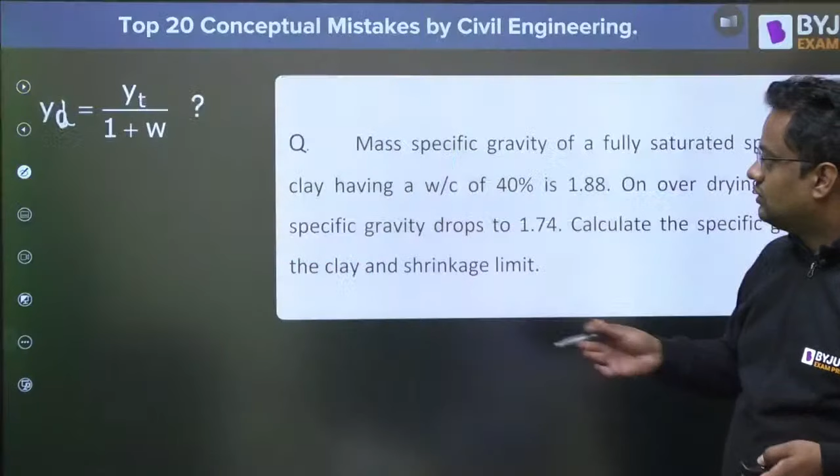Okay, let's come quickly to the top 20 conceptual mistakes, and this is number 1. Everyone out of you might be knowing one formula, that gamma d dry density is gamma bulk upon 1 plus W. Yes or no? Please let me know in the comment section. Everybody is knowing that dry density is bulk density upon 1 plus W.

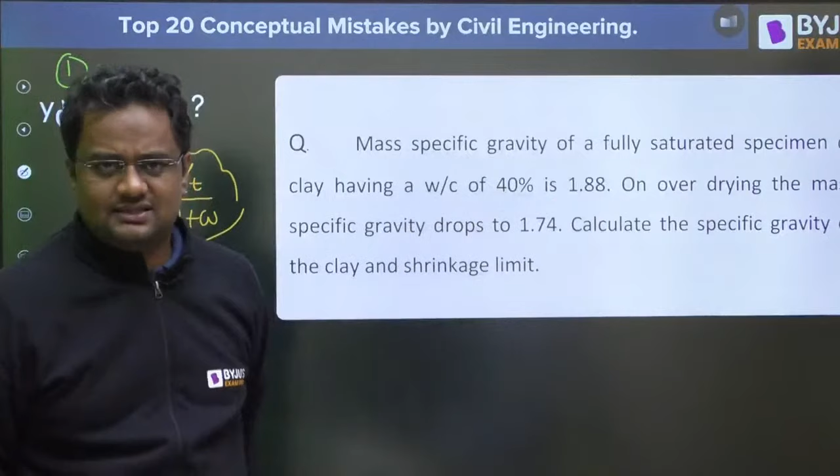Okay, are you sure this is correct? Are you sure this is correct? Let me tell you, let's check. A question is given, I'm not solving this question, I'm just telling you the mistake guys. ये question दे रखा है.

Mass specific gravity of a fully saturated specimen having water content 40% is 1.88. So here the specific gravity is 1.88. That means gamma sat is 1.88 times of gamma W, because specific gravity represents how many times that material is having density with respect to water. So it is 1.88 times, so density will be 1.88 times of gamma W on oven drying.

Oh my god, the specific gravity drops to 1.74. That means gamma D is 1.74. Okay sir, got it sir. So here is a specimen, fully saturated, and here this is 1.88. Density is this 1.88, gamma sat. Okay, and you all are knowing this formula. Okay sir, got it sir.

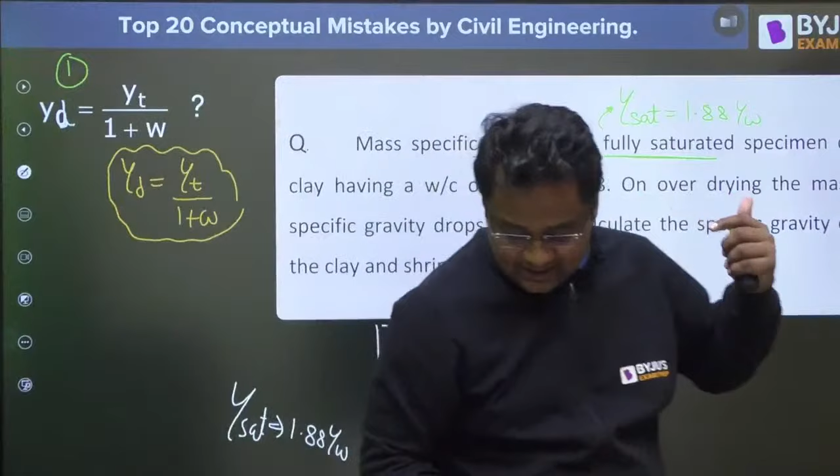Now let's just check करते हैं भाई। From this formula, according to this, gamma D is gamma bulk, that is 1.88. Bulk can be associated with anything, saturated, partially saturated, dry, anything. Gamma bulk means whatever is the case. So 1.88 gamma bulk is 1.88 gamma W, 1 plus water content. Water content is 0.4.

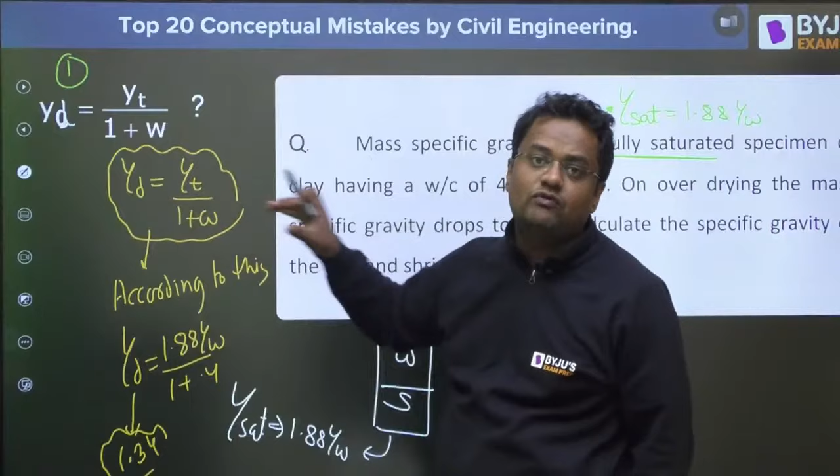You know what is gamma D coming from here? 1.34 is coming. अगर मैं यही फॉर्मूला अप्लाई करूं, if I apply this formula, gamma D is gamma T upon 1 plus W. Gamma T is 1.88, water content is 40%, I am getting 1.34.

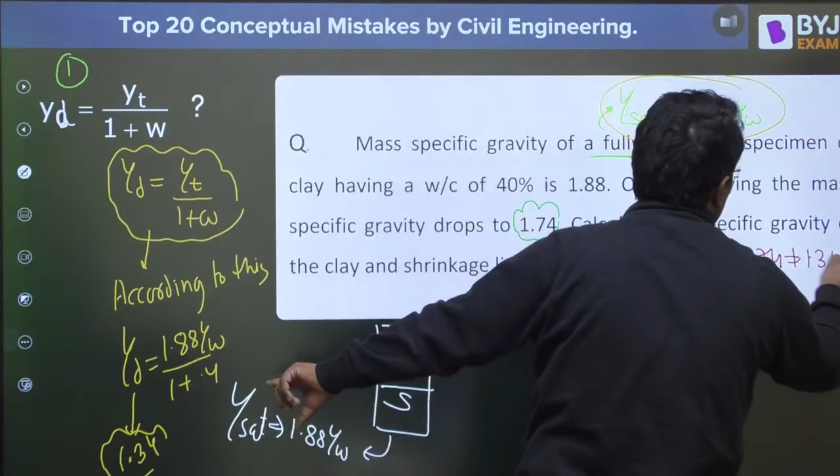But what is the question saying? ये question कह रहा है कि gamma D is 1.74. And as far as I have studied in my college or in my school, 1.74 is not equal to 1.34. This 1.74 is not equal to 1.34. So the question is saying this, but we are getting 1.34. So what is the mistake?

The mistake here is this, see, we know the graph of water content and volume. पहले वो ऐसा रहता है और श्रिंकेज लिमिट के बाद ऐसा रहता है। Must be that this represents that this fully saturated specimen is somewhere here.

On over drying, it is reaching here. So volume is reducing, therefore this 1.344 is not applicable here. Volume is reducing, it is 1.74. That means on oven drying, it becomes something, solid will be same. It becomes something like this. This will be having a density of 1.74.

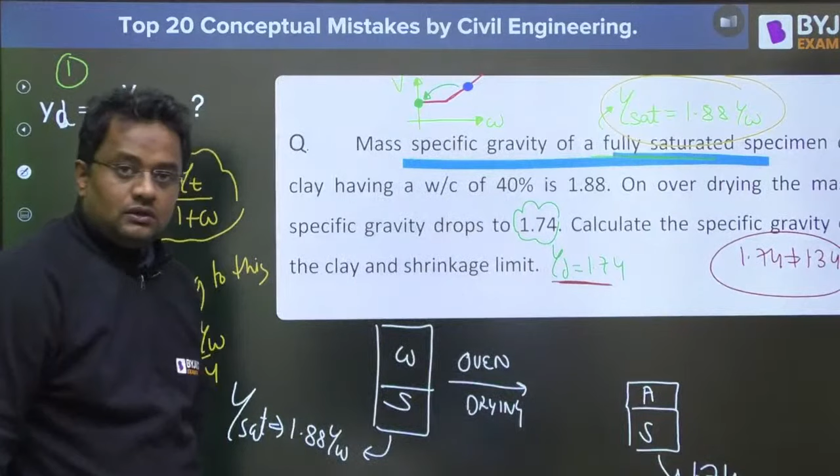Volume is reducing, and this formula gamma D is gamma T upon 1 plus W is valid for same volume. That means if this is something solid and this is this, then this formula will be having a density of 1.34. Of course, gamma D is weight of solid upon volume. Solid will be constant. Volume here is less, therefore gamma D is more. Here volume is more, therefore gamma D is less.

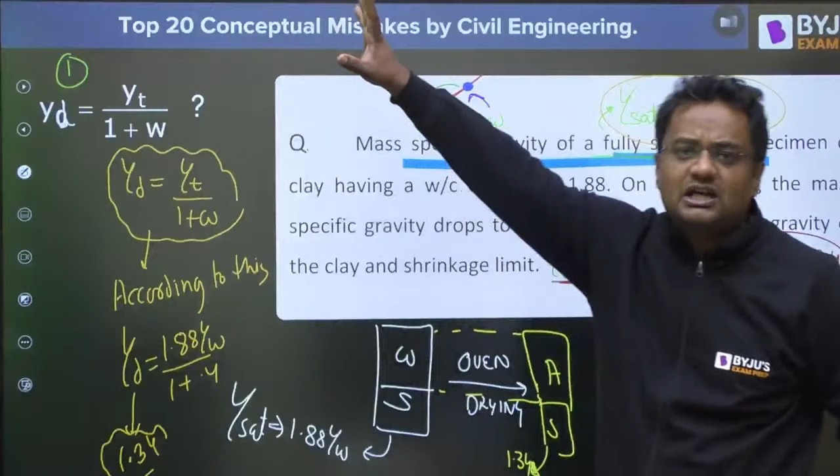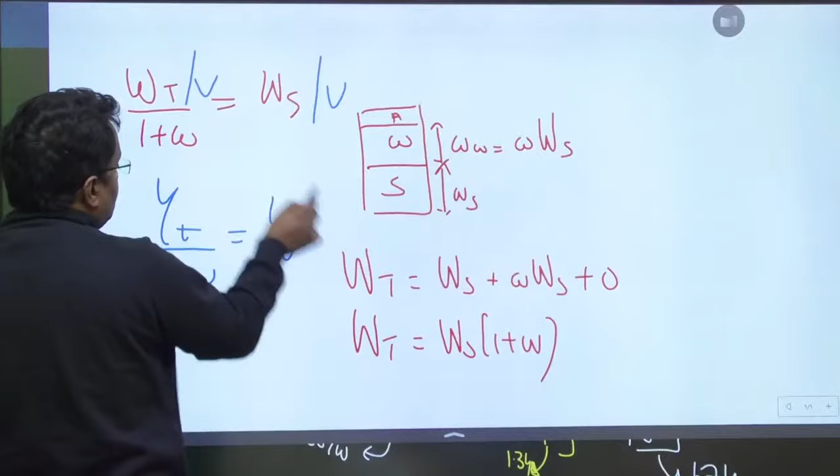See from where this formula comes. Let me go to the more basic, root level. This is solid, this is water, this is air. This is weight of solid, this is weight of water, and weight of water is water content into weight of solid. So total weight is equal to weight of solid plus weight of water. Weight of water is this, weight of air is 0. So total weight is weight of solid into 1 plus W. So total weight upon 1 plus W is weight of solid. Now dividing by volume both sides, weight total by volume is gamma bulk, and weight solid by volume is gamma dry. So this is valid when we have divided by the same V, same V here and same V here. So this formula is applied when here and here volume remains same.

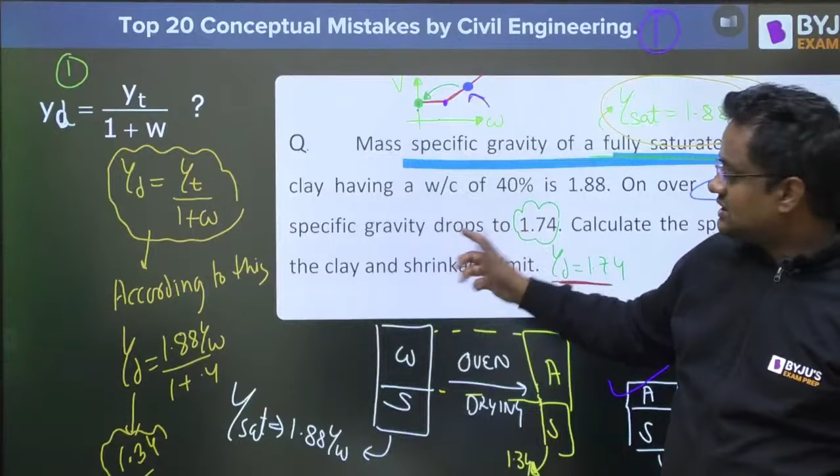Let's move now to the second conceptual point. Very important guys. See, now we are moving to the second point. Now you'll enjoy this session like anything guys.

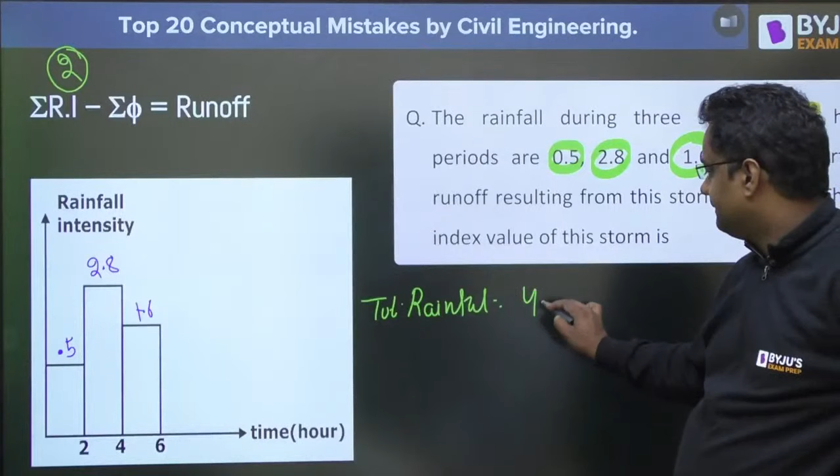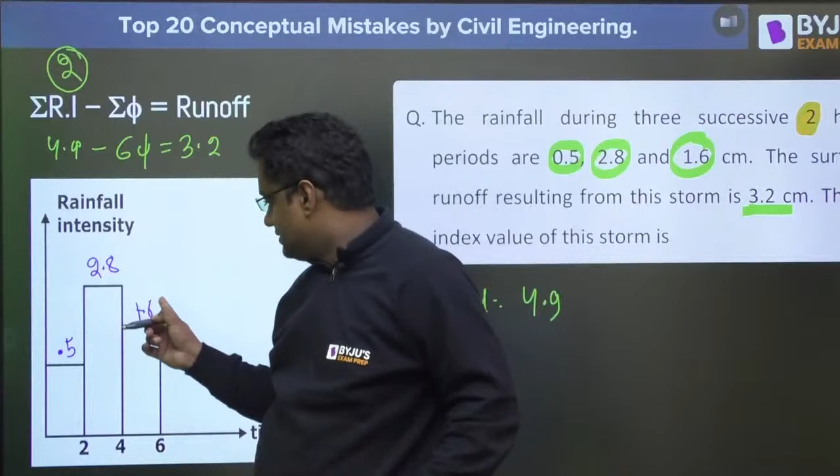I'll give you phi as the rainfall intensity or the water going down per hour. So in 6 hours it will be 6 phi because this is 2. So it is 3.2. So what is the value of phi from here? Please tell me, phi is 0.28 centimeter per hour.

Please check, it is in centimeters na. Please check it is this. Are you getting this? Are you getting phi is equal to 0.28 centimeter per hour? I guess you will be getting this.

And this is absolutely wrong. This is again the wrong concept. Actually phi value is 0.3. Okay, actually the phi value is 0.3.

In 2 hours it is 0.6. 0.3 phi value, the real answer is 0.3 centimeter per hour, or you can write it as 0.6 centimeter per 2 hours. So 2 ghante mein 0.6.

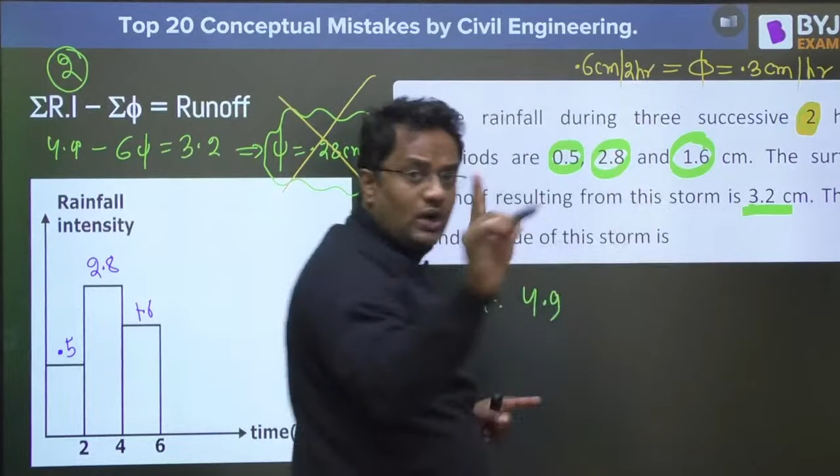So only these two are the period of rainfall excess. Only these two are the period of rainfall excess. So this will not be counted. In phi index, it is the average infiltration over the period of only rainfall excess.

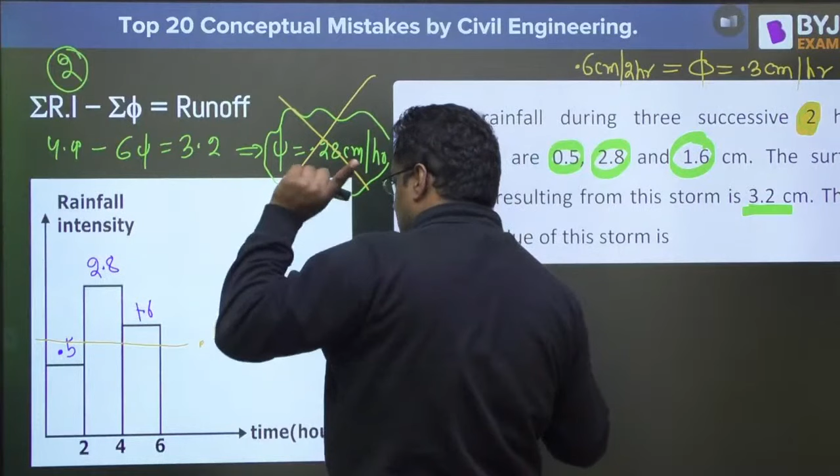Okay, this you can't apply guys. This you can't apply because phi is not the average of the whole period. If you are writing it 6 phi, that means you are pre-assuming that every hour is a period of rainfall excess. So you can't apply this formula here.

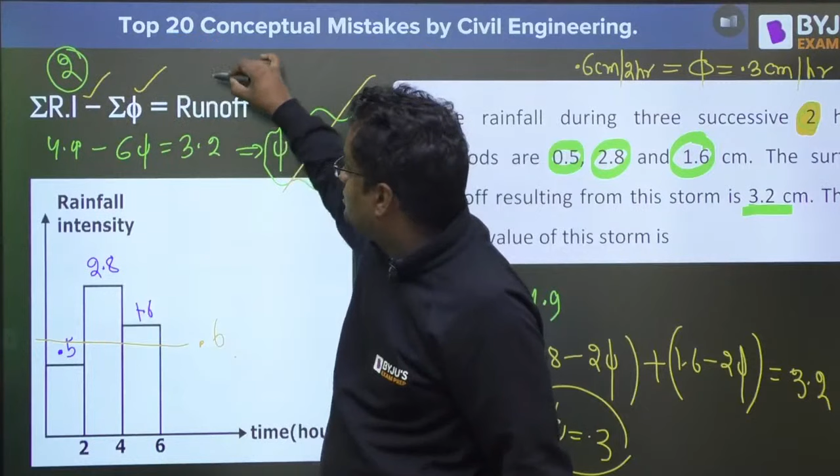If you are seeing that summation of all rain and summation of all going down is equal to runoff, then you are pre-assuming that all six periods are the period of rainfall excess, and you are not sure. So you can't use this formula directly.

This will in fact give you the value of W, because for W it is for all periods. For W it is correct. All summation coming in minus 6 into W is equal to runoff. W is this, this is W. Excellent, because W is the period average of all periods. But for phi, it is not true.

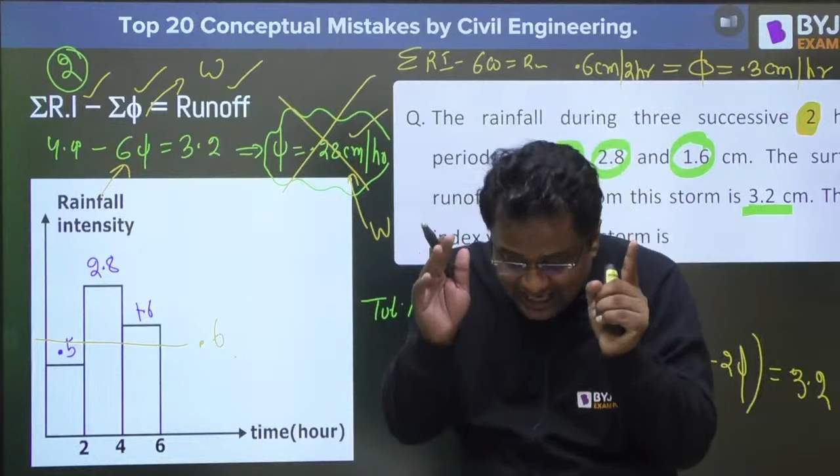You know why? Do you want to see the X-ray of this? Nobody will show you the X-ray of this. Do you want to see the X-ray of this? Why it is wrong? Let me show you. I am guaranteeing you this is the first time in the history that an X-ray will be coming live on YouTube. Let me tell you why this is wrong.

Why is this wrong? Let me do the X-ray of this. What is happening here is that 4.9 is the summation of all this - you are doing 0.5 minus 2 phi. 4.9 is summation of all these. In fact, you are doing this 2 times for 2 hours. Then 2 hours you are doing 2.8 minus 2 phi, and 2 hours you are doing 1.6 minus 2 phi equals 3.2.

These two are correct, because phi value from whatever method you are using will be coming 0.3. These two are correct, but actually what is happening here - suppose the phi value, or this should not be multiplied by 2, because this 2.8 is already of 2 hours. 2.8 is already of 2 hours. 0.5 is already of 2 hours. Suppose phi, this is 2 phi, this is 2 phi. So what is actually happening now?

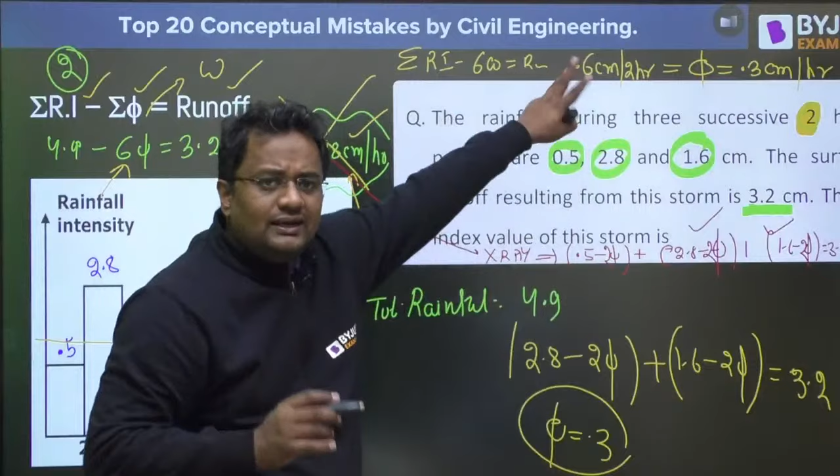Here phi is 0.3. You can calculate 0.3 as any value, whatever method you are using. 0.3 into 2 is 0.6. 0.3 into 2 is 0.6. 0.5 minus 0.6 is minus 0.1. So actually you are taking this as minus 0.1. But runoff cannot come minus 0.1.

Runoff cannot come minus 0.1 because in the first 2 hours rain is coming less and infiltration capacity is more. So all rain will go down. Minus 0.1 will not be the runoff - it will not come up. Runoff will be 0 here.

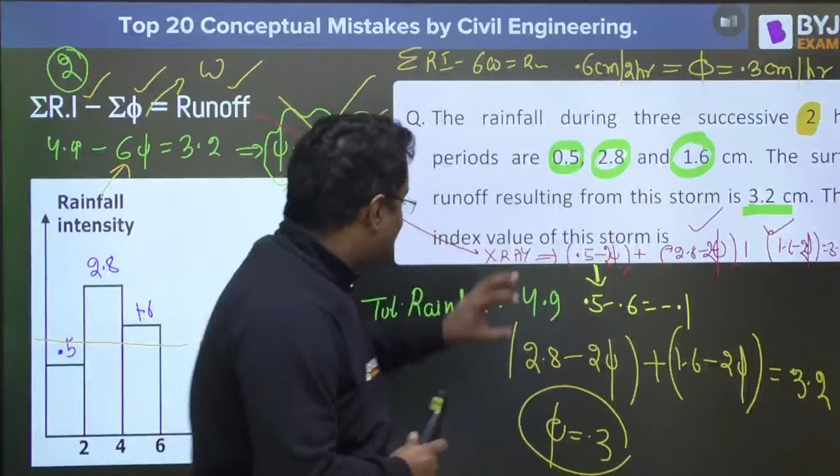Enjoyed? Enjoyed, guys? Everyone, please let me know.

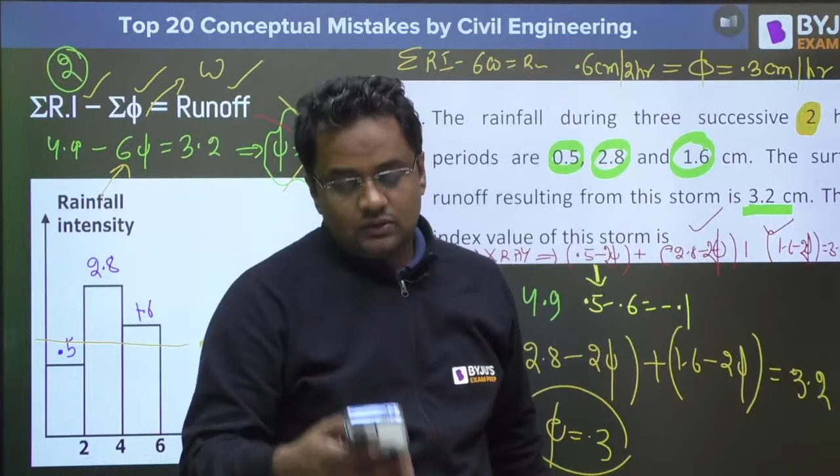Okay, now let's move to the next one.

Sometimes you are using this formula, but please check if it is normally consolidated soil or overconsolidated. Because if it is overconsolidated soil, then delta H should not be written using Cc. It should be written as Cr H0 over 1 plus E0, log sigma 2 bar by sigma 1.

And in fact, one more case can come - this is point number 3. From sigma 1 bar to sigma bar 2, you are increasing stress from here to here. There is in between a value sigma 3 bar. Up to here the soil is OCC, and up to here the soil is NCC.

So here you have to apply the formula delta H equals CR, because it is overly consolidated, into H0 over 1 plus E0, log sigma 1 bar from sigma 3 bar, plus here it is NCC, so Cc H0 over 1 plus E0, log sigma 2 bar from sigma 3 bar. Total settlement will be the summation of this. So it is not that every time you use this single formula. Please check - if the soil is NCC, this formula is fine. If the soil is OCC, this formula is fine. If from a particular range it is OCC and a particular range it is NCC, then the combination has to be used. Got it or not?

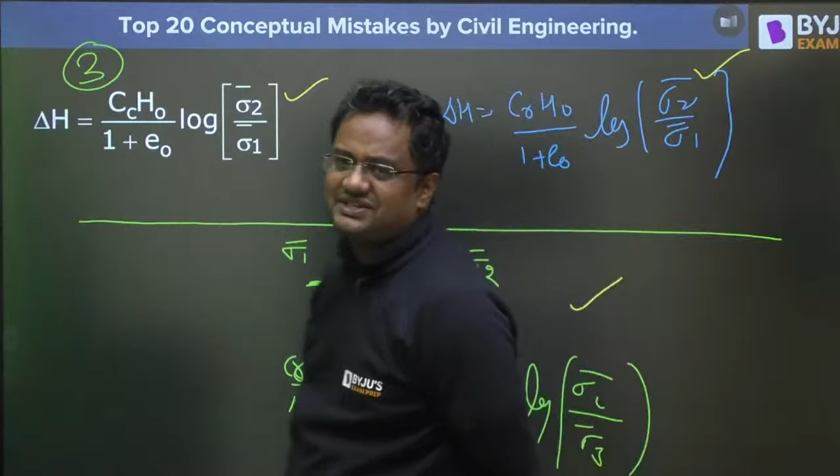Let's move to the point number 4. Okay, what is this here?

What is this here? Guys, you have studied two formulas. The shear strength is C plus sigma tan phi, and shear strength is C dash plus sigma bar tan phi dash. C, phi are total stress parameters and C dash, phi dash are effective stress parameters.

Now guys, first of all, cohesion and friction angle C and phi are not the inherent properties of soil - that depends on the type of testing. C and phi are not a fixed property of soil. If you do a test in which you put drained conditions, C and phi will be different. In the same soil specimen, if you put undrained condition versus drained condition, C and phi will come out different. So C and phi depend on the type of testing.

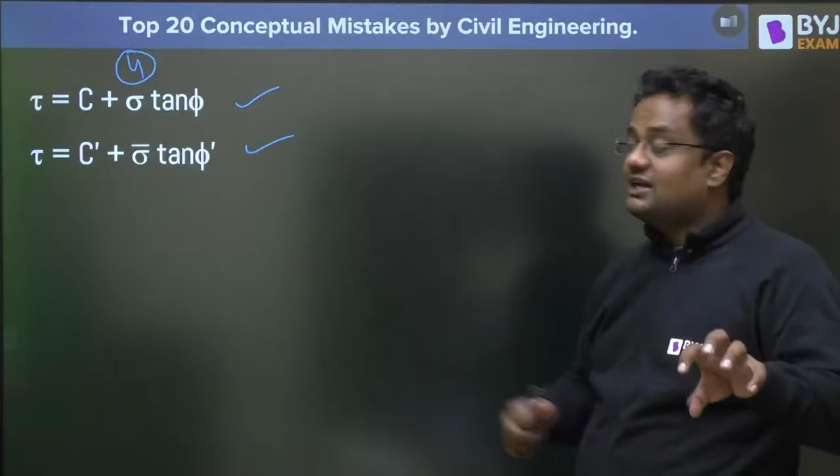If by chance everything is given - C is given, phi is given, total stress parameters, effective stress parameters are given, sigma is also given, U is also given, so that you can find sigma bar also - if everything is given, then in such questions you should be using this formula because this gives more appropriate results.

This was question number 4 and this is question number 5. Guys, phi greater than 36 degree is general shear failure, so this formula is applicable for shallow foundation, for Terzaghi. For phi less than 28, or you can say 29 in some books, it is local failure - local shear failure. You have to modify the formula because Terzaghi has given the formula for strip footing and general shear failure. If footing is something different, square, circular, you have to use shape modification factor, and if it is not general shear failure, it is local shear failure.

Instead of C, you will be writing 2 by 3 C, and instead of NC, NQ, N gamma, you will be writing NC dash, NQ dash, and N gamma dash. NC, NQ, N gamma are function of phi. These are also function of phi. But here, these are function of phi, and these are function of phi m, where tan phi m is equal to 2 by 3 tan phi. From there, you will find out the value of NC dash, NQ dash, and N gamma dash.

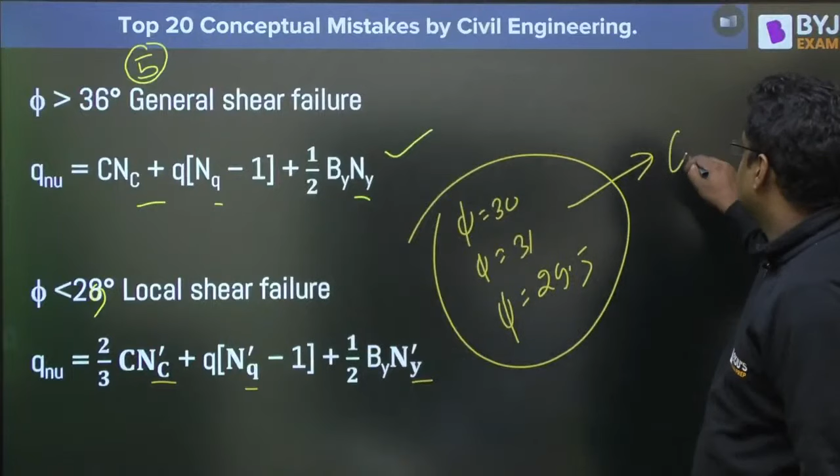Now sometimes, 2-3 questions have come in GATE in previous years where phi is given as 30 degree, phi is given as 31 degree, phi is given as 29.5 degree. Then what to do? Because greater than 36 is general shear failure and less than 28 is local shear failure, but this value is in between - so which should we apply? Guys, in such cases, please apply the formula of general shear failure. By default, if nothing is mentioned and phi is not less than the 28 or 29 value, we have to use general shear failure.

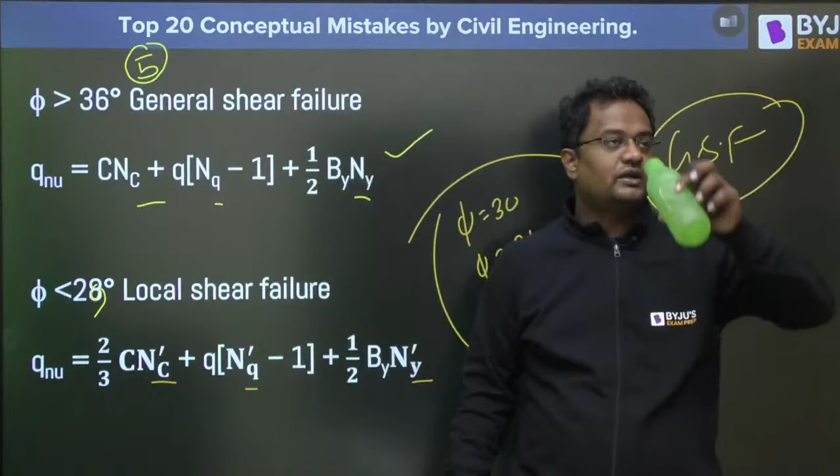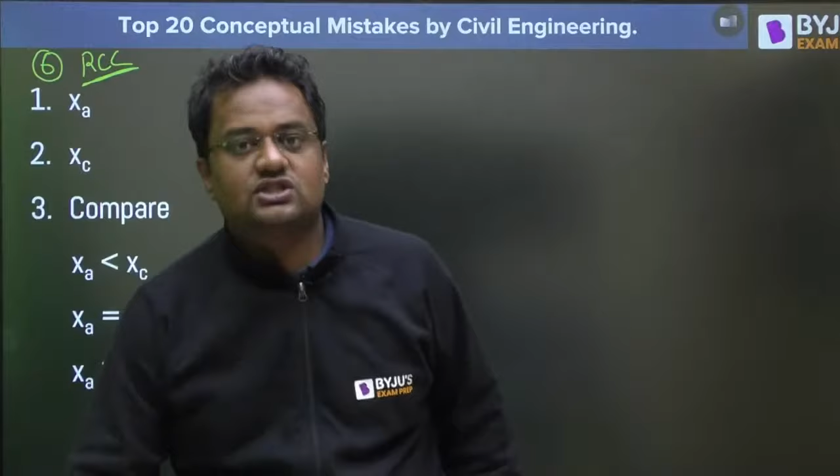Okay, this was point number 5. Let us move to point number 6 of RCC. Every chapter I am completing, guys - it is my recommendation that just before the exam day, please watch this session, it will be helpful for you. Okay, very interesting point again now - the 6th point, the 6th conceptual mistake from RCC.

What we generally do: first step, calculate the actual depth of neutral axis. Second step, find the critical depth of neutral axis. Now third point - if the actual depth is less than XC, then it is under-reinforced section. If actual depth is equal to XC, then it is balanced section. If actual depth is greater than XC, it is over-reinforced section.

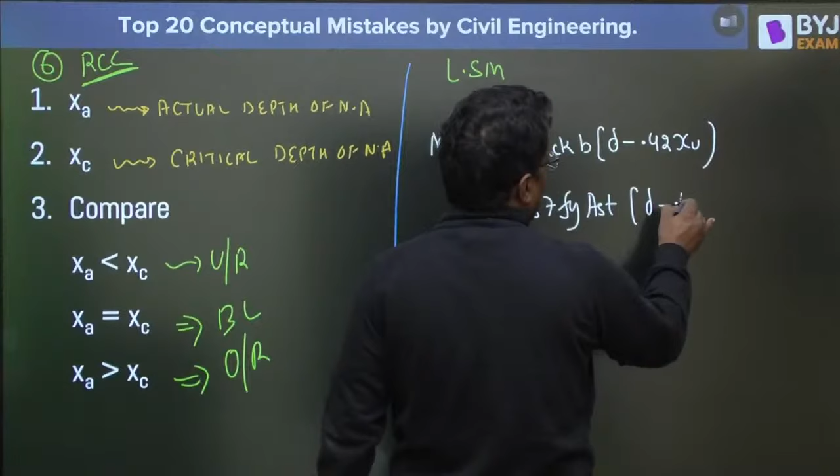Okay, got it sir? Understood sir? Now, what happens in limit state method - if moment of resistance is asked, many students make a mistake here. So moment of resistance is 0.36 FCK into B into D minus 0.42 XU - check the formula, okay - or 0.87 Fy, that is stress into area, that is force; stress into area is force, force into lever arm is moment.

What happens if our XU (you can call it XA or XU, same thing) - if XU is greater than XU limiting, in the case of over-reinforced section, sometimes you apply the formula MOR equals 0.87 Fy AST into D minus 0.42 XU limiting, because XU has to be limited up to XU limiting according to assumption number 6 of LSM, where the strain diagram should not be more than 0.87 Fy/ES plus 0.002. So you put this, but guys, let me tell you, this becomes wrong, because you have to put your neutral axis limited up to the balance section.

So you have written here XU limiting, but one mistake you have done, you have provided AST. This AST is of over reinforced. So the better answer here, many students make this mistake in the exam. You have to balance up to the balance section, up to the limiting. Students think that if they put limiting, it will be correct. No, here also you have to put the AST of balance section, AST limiting, D minus 0.42 XU limiting.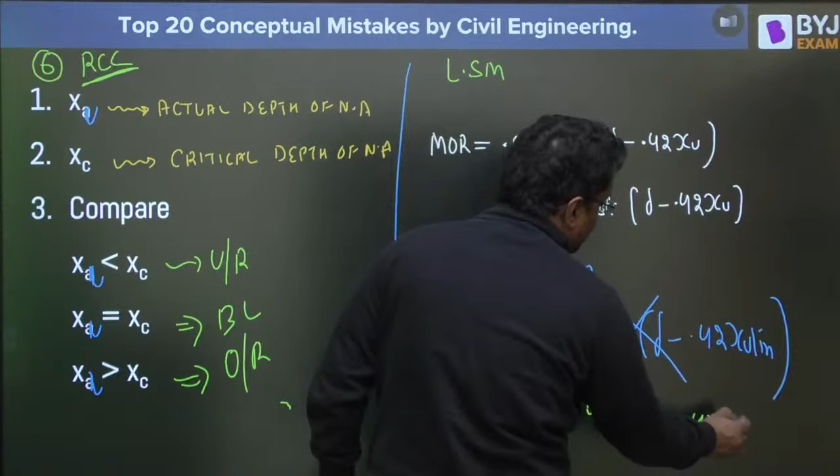This is correct, or it is better to find the MOR from the compression side in limit state. Otherwise in WSM every time this problem will be coming. So it's better to use from the compression side, that is 0.36 FCK B into XU limiting, into D minus 0.42 XU limiting.

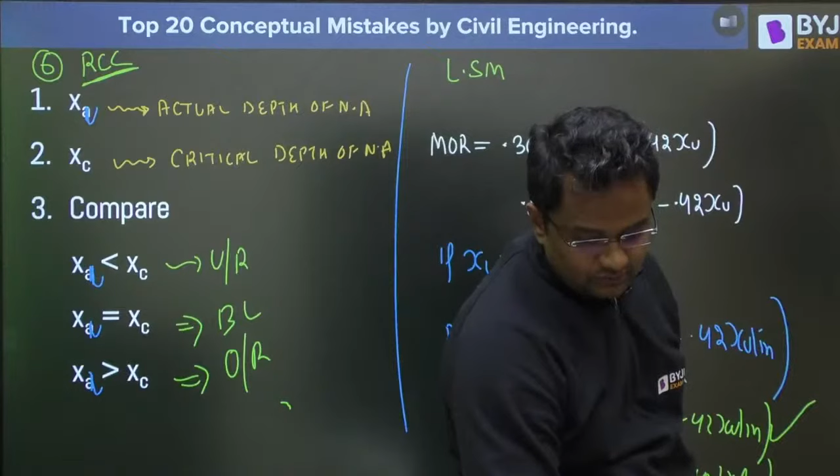Okay, now this was the 6th point. Now let us come to the 7th. Guys, whatever I'm showing you on the screen in the 7th, you have to answer in 30 seconds in the comment box. What is the intensity of UDL?

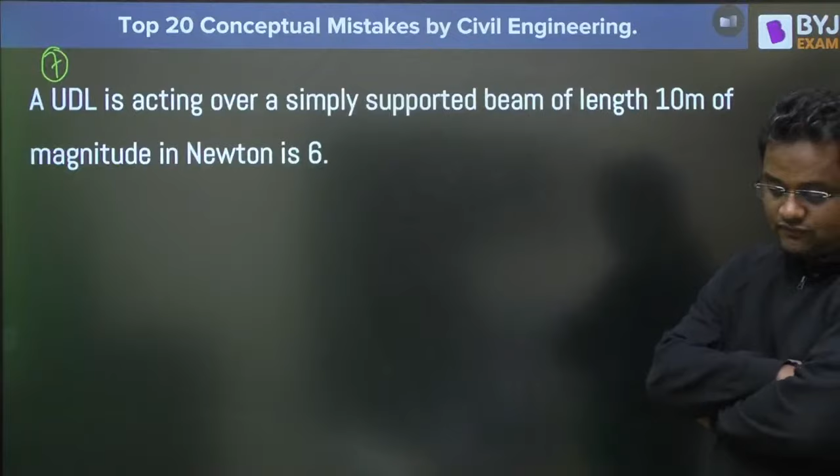What is the intensity of UDL? In 5 to 10 seconds you have to reply. Come on, come on, come on. It is acting over a simply supported beam of length 10 meter and magnitude is 6. So what are you replying?

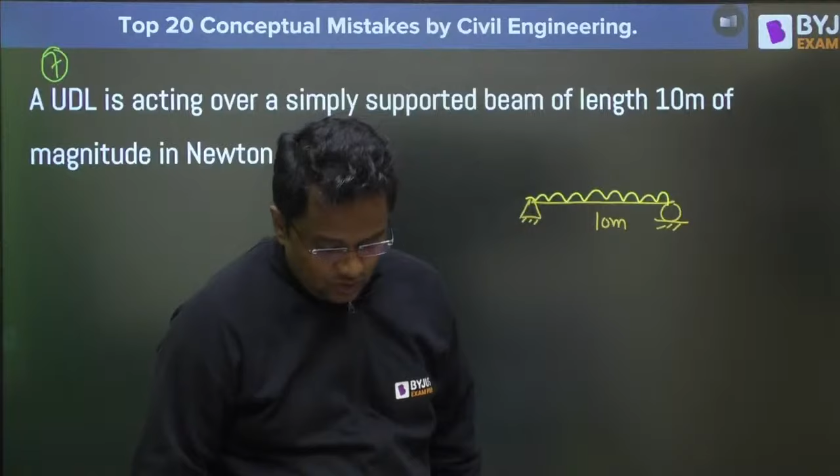Okay guys, W intensity in Newton per meter is equal to 6 - this is again wrong. Sometimes these days the question says that UDL is acting over a simply supported beam of length 10 meter of total magnitude of total load.

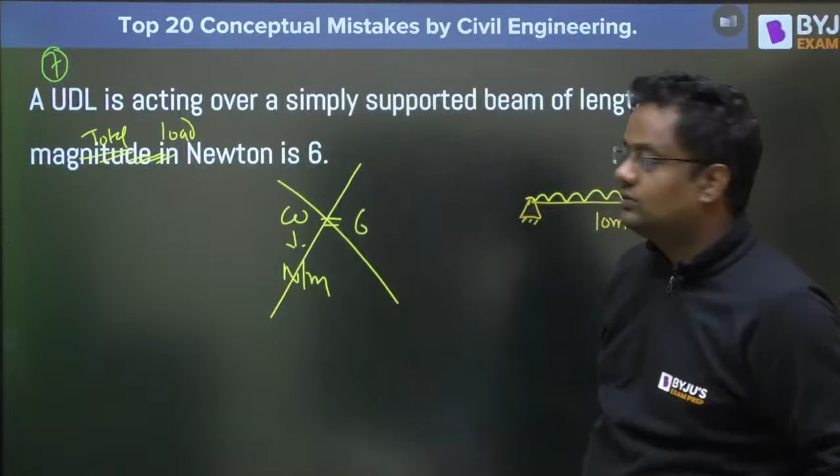So here what is it saying, total load? Sometimes these kind of questions are coming. W per meter is W, so over the length it is WL. It is given as 6, so W is 6 by 10, that is 0.6, not 6. 0.6 Newton per meter.

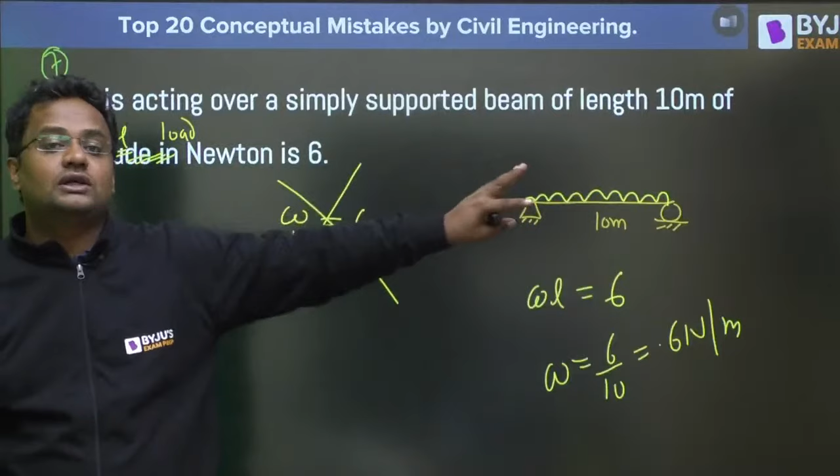Instead of saying they are giving UDL, they are giving total load - the total load in Newton is 6. So that is how you have to calculate this question. You should not take W as 6, otherwise the question will go wrong. Please take this precaution in the exam.

Now guys, many teachers in the whole of India, I have seen this point - point number 8, correction of sag is this, for n number of bays equal to 1.

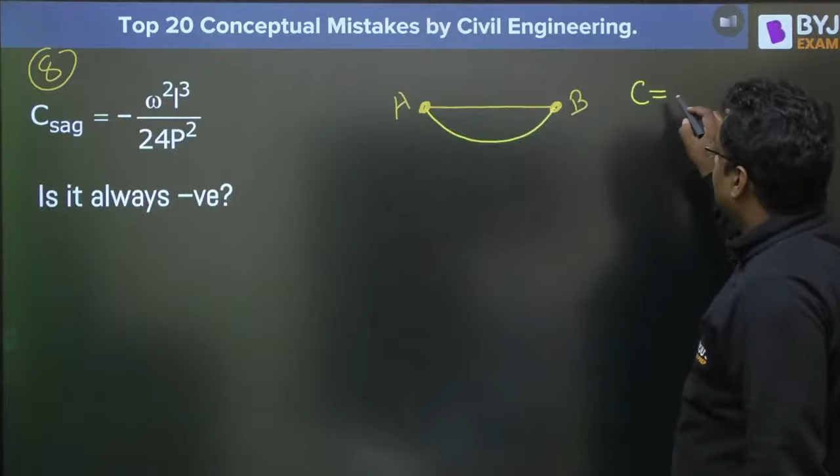The true value is the horizontal distance, because in a map, horizontal distance is projected. Why is the horizontal distance the true distance? Because in a map, the horizontal distances are taken for making the map in orthographic projection. This is the true value. And what is the measured value? This one.

Because the tape is now, if you put it with very less pull, it will be like this. So this yellow one is bigger, so it is negative. But my question is, is it always negative? Please let me know, please let me know.

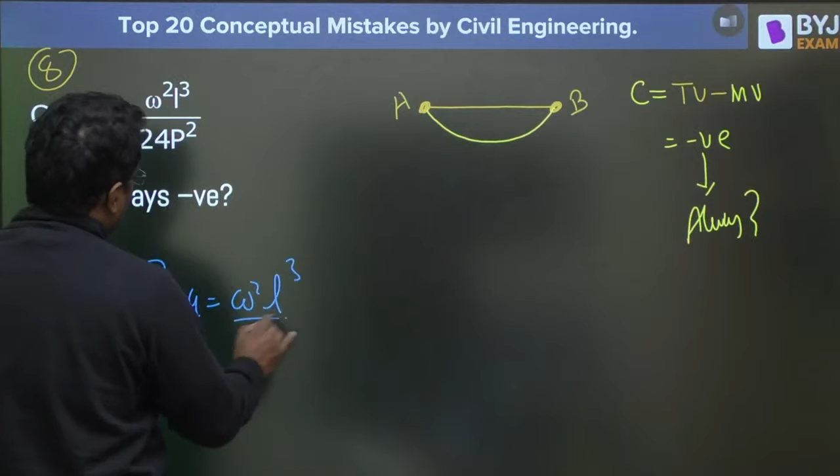No, it is not always negative. Correction of sag can be W square L cube upon 24 P square. It can be this. Now let me tell you the explanation.

Usually what happens is that the producer, the tape manufacturer, the factory, the company assumes that the surveyor is good with his mind. They assume everything is fine and that you will be taking the reading in flat. The tape is made for flat, standardized for flat. That person should be taking reading in flat, but you are taking in sagging position, catenary position. So you are taking the more value.

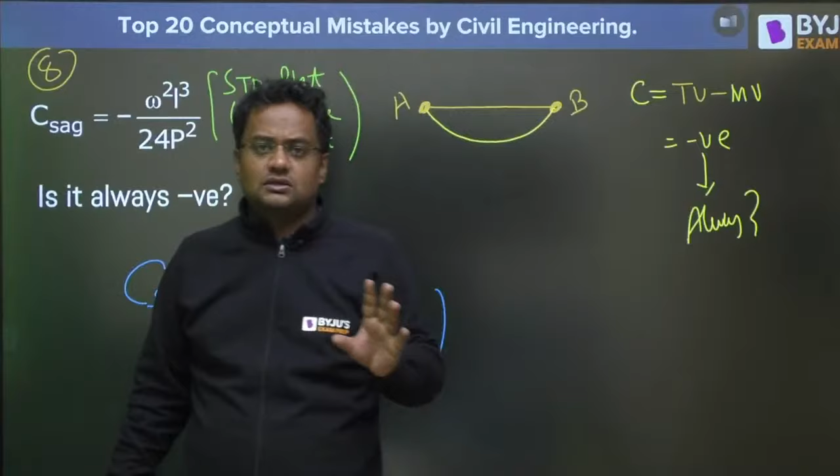Measured value is more, so correction is negative. But sometimes the manufacturer, the factory, all the people are doing the reading in catenary only, in the sag only. So they make the tape standardized for catenary. If you are taking a reading like this, it will be correct, it will show the horizontal value.

How have they done this? The actual tape is this: 0, 1, 2, 3. What will they be doing? This is the actual tape. They will be marking 0, 1, 2, something like this. They will be elongating the values from the original value. They will elongate it such that you will be taking more reading, more length.

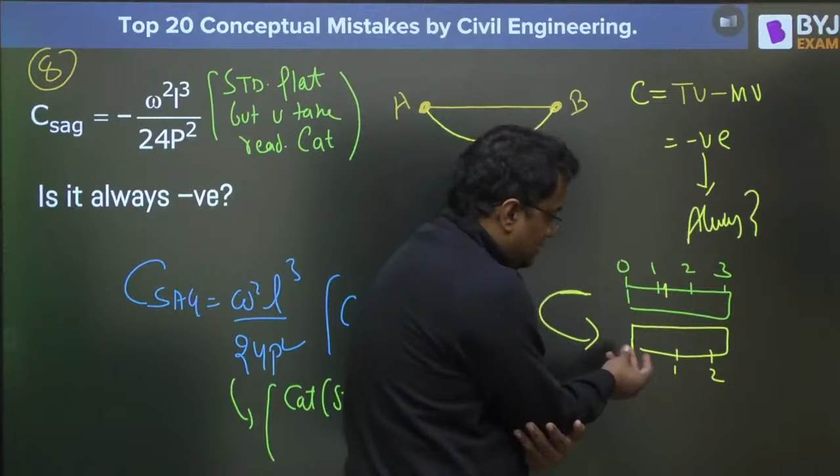From this tape, more length, your measuring might be correct because this tape will be measuring less, na? Actually, up to here it is 1.2 value, but it is measuring only 1, it is measuring less. So they make the tape standardized such that you will always be using it in catenary. So no need to apply correction. We are making a magical tape here, which is standardized for catenary.

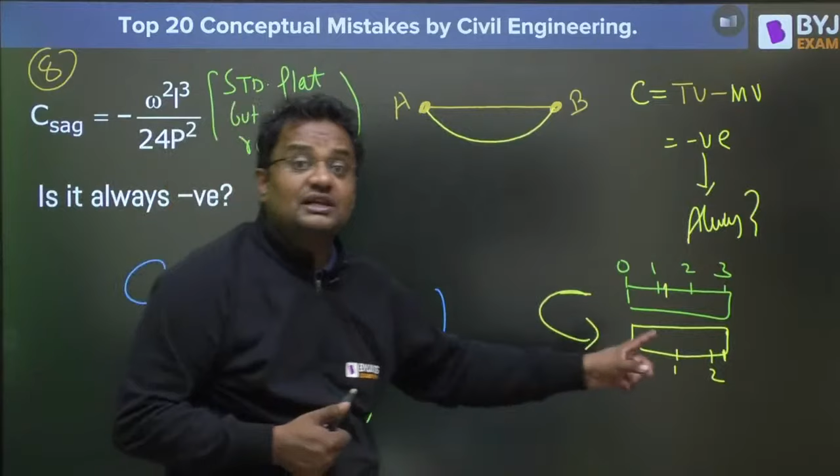But now suddenly the people become very expert, very attentive. The surveyor becomes very attentive and takes the reading on flat. He has not made the tape sagging like this. So from this tape you are measuring less value. Up to here the length is 3, but you are measuring here something like 2.2, 2.3. You are measuring less, so correct measured value is less there. So correction has to be positive.

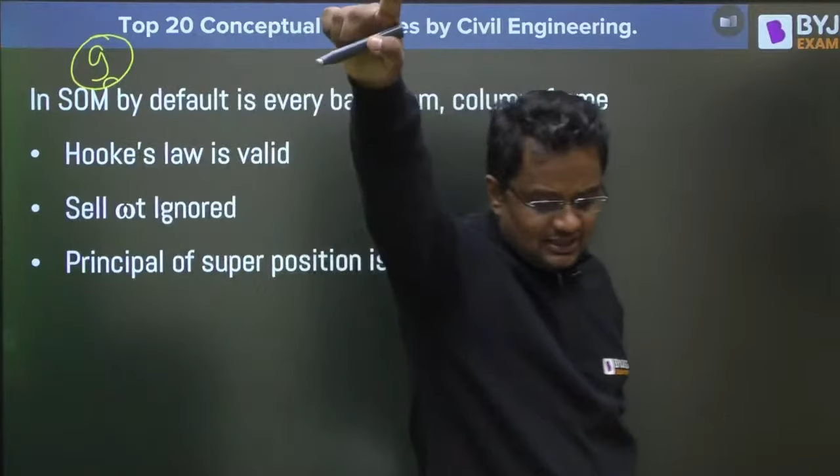Okay, if nothing is mentioned by default, you will be using this. But if nothing is mentioned, you will be using this. Okay, let's move to the next point.

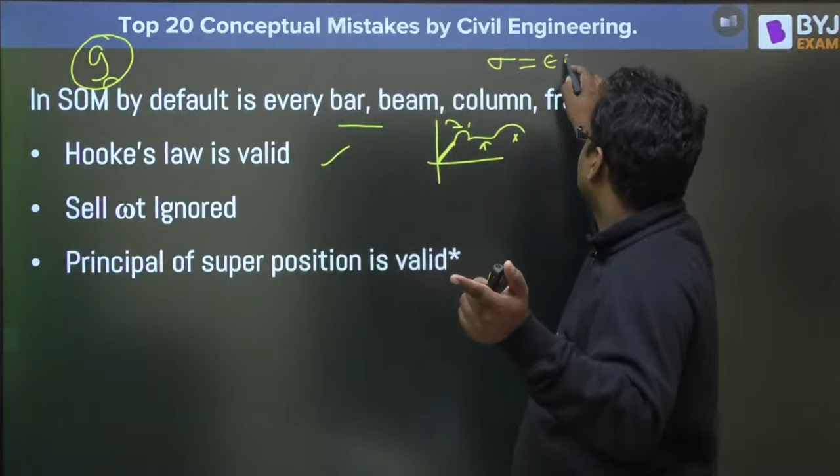Guys, in SOM, whether it is beam, column, bar, frame, or any structure, Hooke's law is valid, although Hooke's law is only valid up to the proportional limit. Beyond that, Hooke's law is not valid, because Hooke's law says stress equals strain into Young's modulus. This is degree 1, sigma to the power 1, strain to the power 1. This is a linear equation, so it is only valid up to the straight line. But if nothing is mentioned, Hooke's law is always assumed valid.

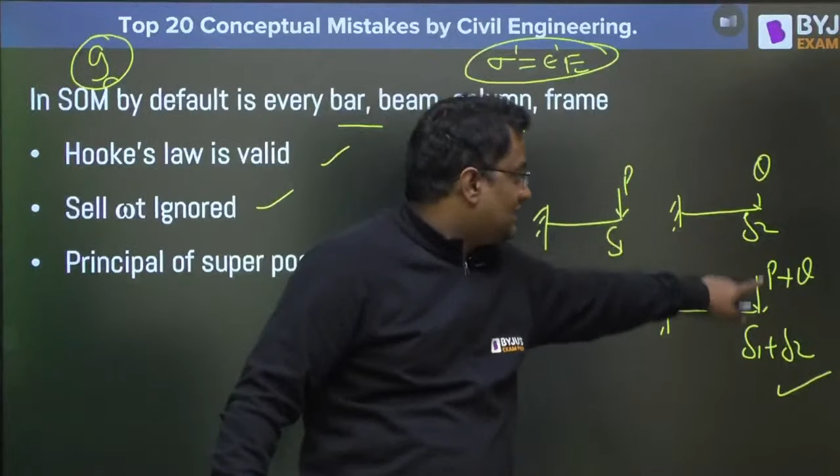All the beams, columns, bars, frames - self weight is ignored, and the principle of superposition is valid. Why the star sign? Consider this is P, this is Q, and this is P plus Q. Deflection here due to P is delta 1, here due to Q is delta 2. So total is delta 1 plus delta 2, correct, because delta is PL cube by 3EI, so P has power 1. Whenever the power of that factor in superposition is 1, superposition is valid. That is why the star.

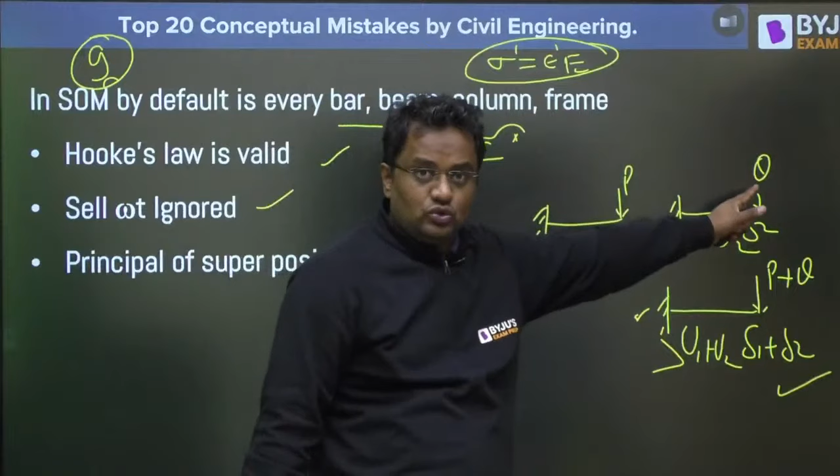But for strain energy, it is not possible. Strain energy here is U1, here U2, but here strain energy is not U1 plus U2 - it is greater than U1 plus U2, because in strain energy the formula involves P square. So here it will be Q square, but here it will be P plus Q whole square, which equals P square plus Q square plus 2PQ. That extra 2PQ term comes in. So principle of superposition is valid only when that function has a power of 1.

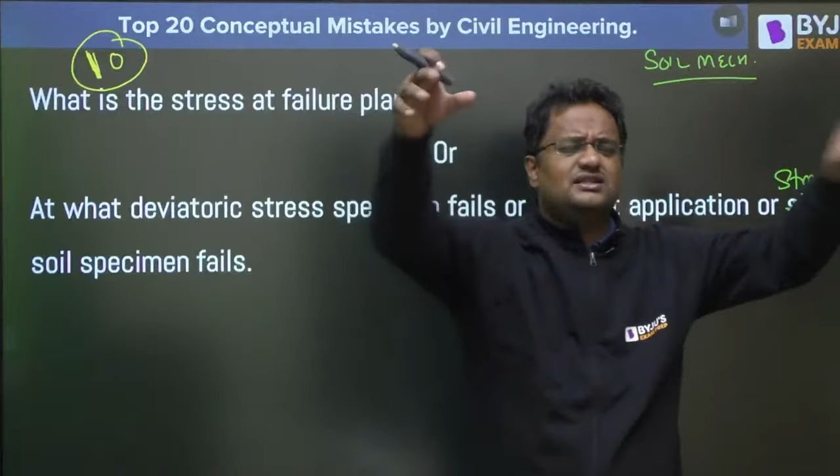Do these both questions have the same answer? No. Both questions are different. Both questions are different. Let me tell you now.

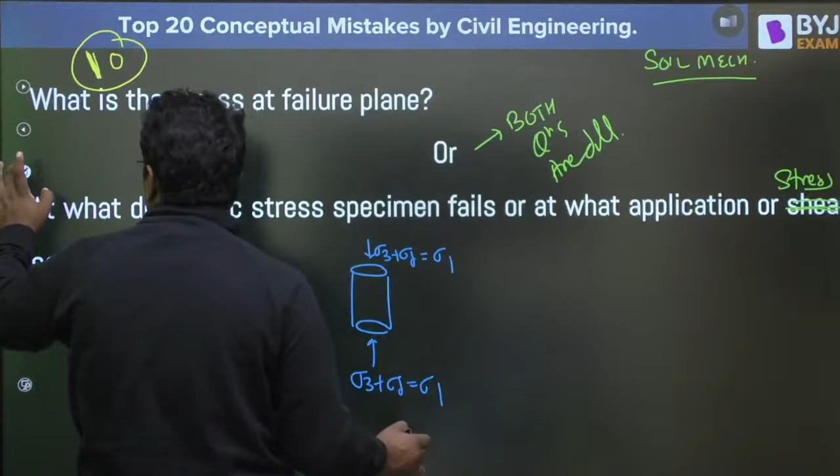On the soil specimen, you apply sigma 3 plus sigma d equal to sigma 1. Sigma 3 plus sigma d equal to sigma 1, and from here it is confining stress. Now if we draw the Mohr circle, here it is sigma 3 and here it is sigma 1. Suppose the failure plane is something like this, and suppose this value is alpha.

So what is the stress at the failure plane? Suppose they are asking normal stress. This answer is actually alpha. And at what deviatoric stress does the specimen fail, or at what application of stress - that answer will be sigma 1 and sigma 3. Have you got it? So please check - sometimes the option available will be alpha, sometimes the option available will be sigma 1 and sigma 3.

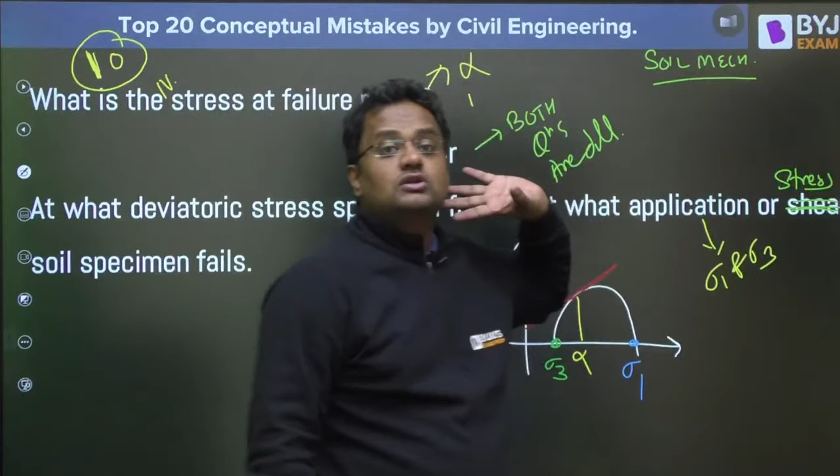See, just feel - the failure plane is not this. The failure plane is not this. How can this be the failure plane? Here the strength is more. This red line is representing the strength, the failure envelope. Failure will be here, failure will be here. Okay, this yellow is the failure plane. This yellow is the failure plane.

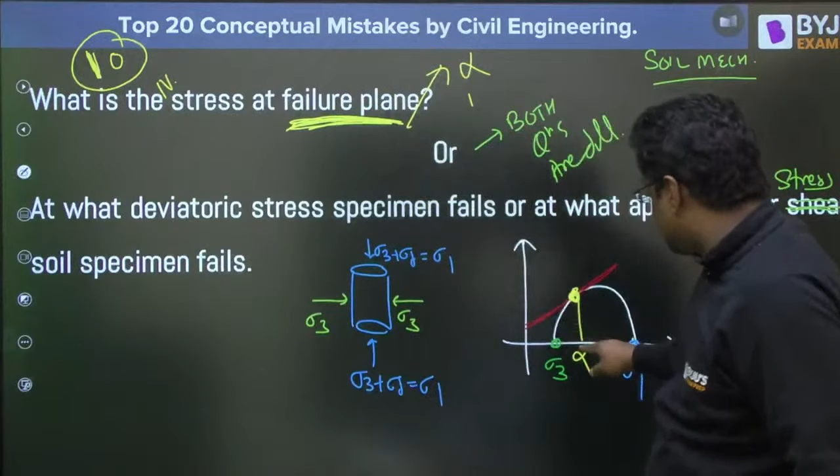So these two questions are different - otherwise everybody will be crying after the exam if you are not taking this session seriously. What is the stress at the failure plane? Answer is alpha - this is the failure plane. And at what deviatoric stress, or at what stress - the answer will be sigma 1, sigma 3, or sigma d. Got it, guys? That is why at the beginning I said this session will be one of its own kind.

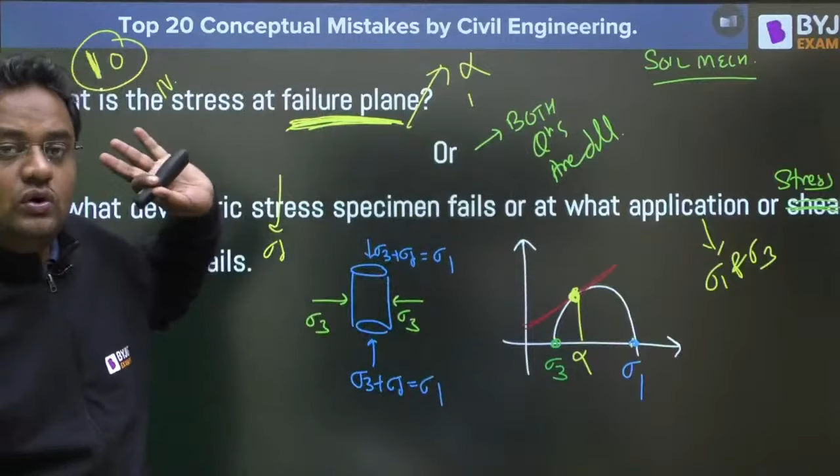Now, this is also very confusing to students. Tell me the answers - tell me answers in the comment section. Here there is soil. Tell me answers - if nothing is mentioned, will you solve the question by taking it as active case, passive case, or rest case?

By taking it as active case, passive case, or rest case. Tell me.

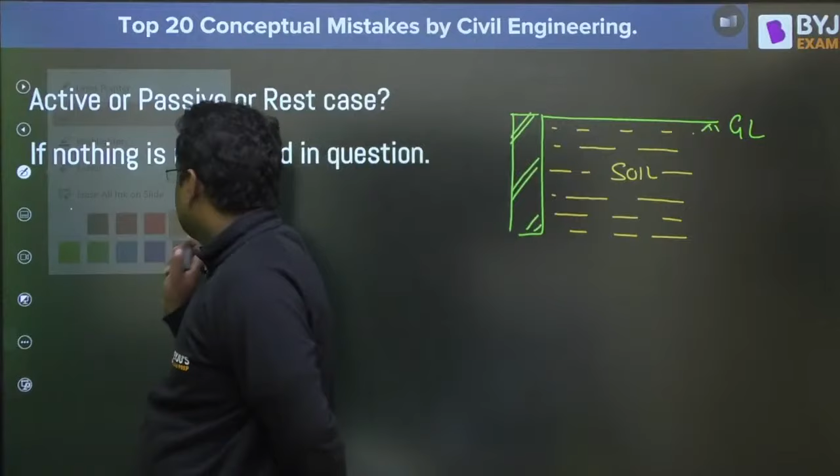Good, Shreyas, good, excellent. Guys, if nothing is mentioned, by default in 99.9% of cases, soil will be pushing it here, so it will be away from the fill. It is mostly active - if nothing is mentioned, it will be taken as active case. It is not a magnet, it is not iron, so that it will be pulling it here and attracting it here. Passive case will only be when some wind load or earthquake or some dynamic force is pushing it here. Otherwise, in the natural case, 99.9% of the time soil pushes it away here, away from the fill, so it is active case. Got it?

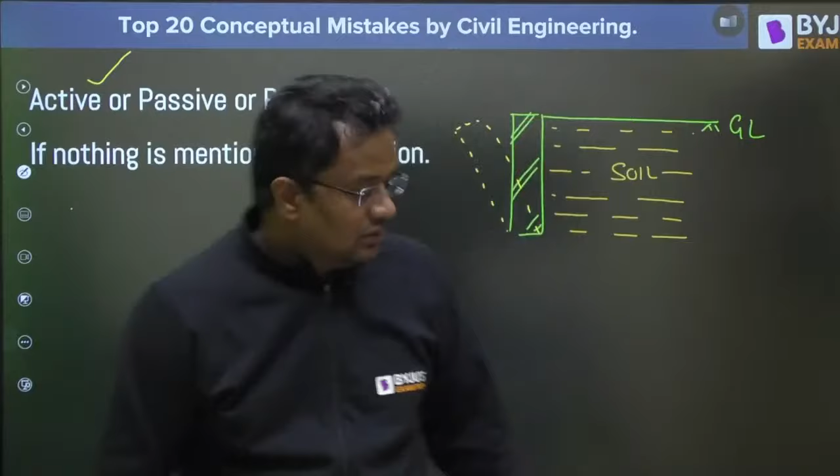This was the 11th point. 12th point - guys, you have seen two formulas of superelevation. This is the derived one in meter per second SI units, and this one is also in SI units.

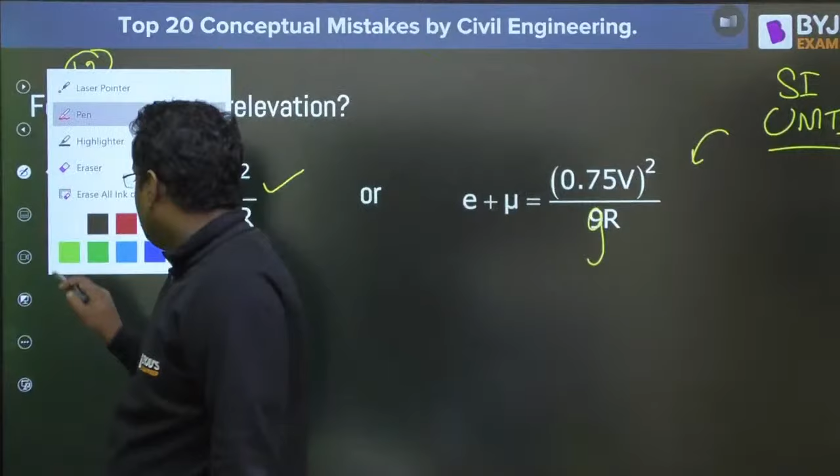See, when to apply which formula? If the question is about mixed traffic, where the traffic is mixed of different velocities - when different velocities are there, for every velocity there will be a different superelevation, and we cannot provide a different one for each. We can provide only one superelevation. If superelevation is this, we cannot provide this, we cannot provide this, we cannot provide this - once it is fixed, guys, it is fixed.

Now suppose you are designing the problem. So for design, the formula is E equals 0.75 V squared by GR, for mixed traffic and design condition - when we are designing, because we cannot design for every individual velocity. Once a road is designed, it will be designed for every velocity. So if design is the problem, if in the question the word 'design speed' is used - design speed is 50 meter per second, design speed is 70 meter per second, design speed is 90 meter per second - then you have to apply this formula.

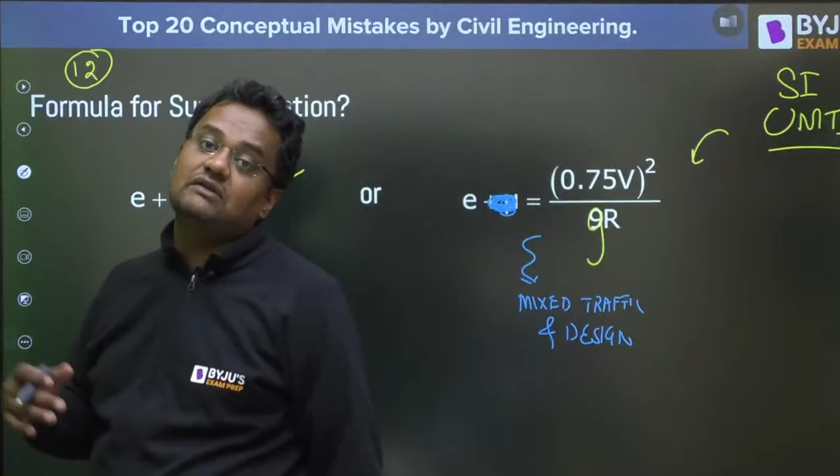This is used when the question asks to find superelevation for a design speed, say 60 km per hour. Design speed is not for one vehicle, design speed is for the whole traffic, mixed traffic. So when the question says design speed, you use this formula.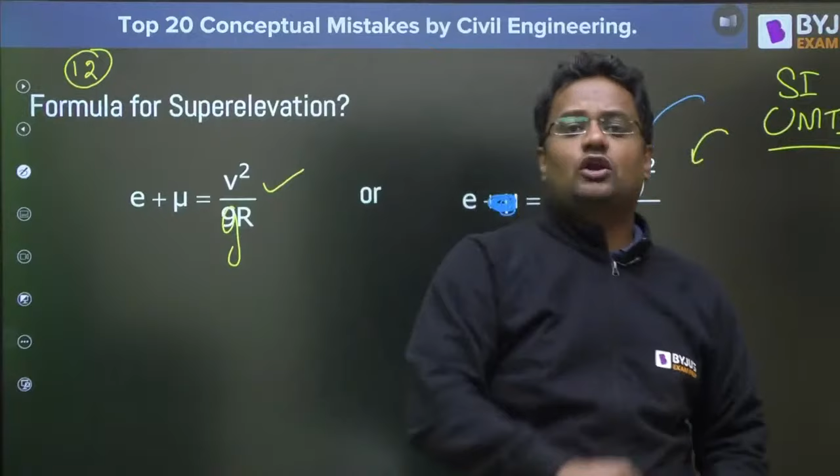But when the question asks for a particular vehicle moving at, say, 27 km per hour, find the superelevation required for that particular vehicle, then a different case arises. For that vehicle, what speed, what superelevation is required - this formula has to be applied. And this formula itself has one more sub-case.

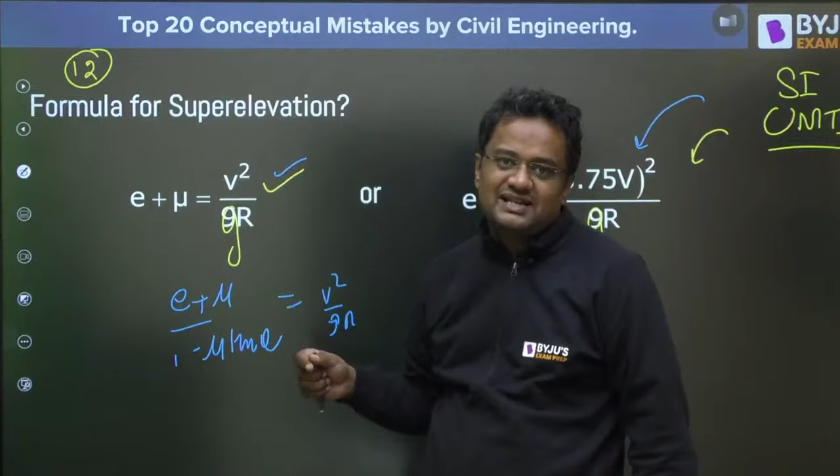This formula comes from the derivation: e plus mu by 1 minus mu tan theta is equal to V square by GR. Mu is 0.15, and theta is small, not like 90 degrees. So since theta is small and mu is also small, you take 1 minus mu tan theta as approximately 1, and write the simplified formula.

But once, in GATE 2014, the question was asked for a Grand Prix road where the superelevation is 35 degrees. Why is superelevation more? Because V is also more in a Formula 1 race. In that case, someone used the approximate formula.

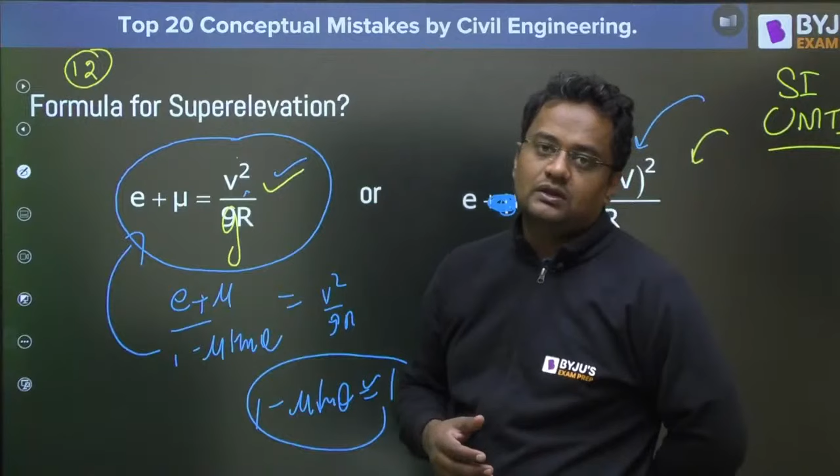GATE gave the correct option for this too, marks to all, but that year IIT Kanpur issued a notice saying they accepted all such answers that time, but not from the next year. So from 2023, 24, 25 onward - if a particular vehicle has very high velocity and very high theta, you can't neglect the mu tan theta term. In that case, you have to apply the exact formula.

Got it or not? Enjoying or not, guys? This is the level of this session.

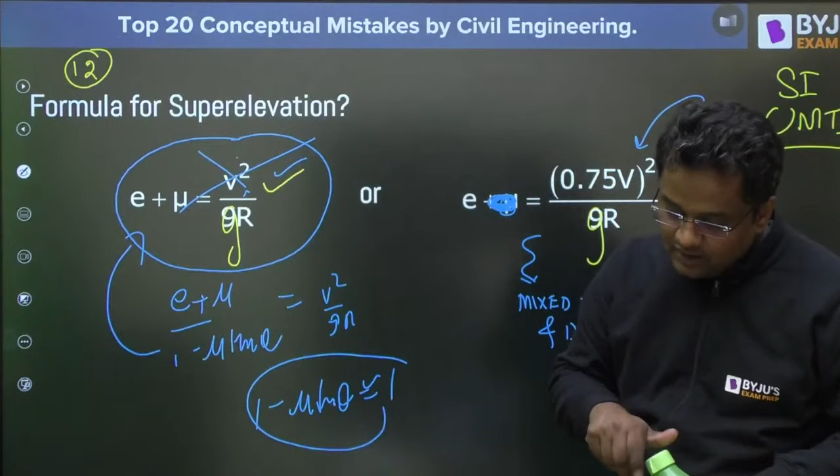Alright, shape of ILD - just giving you a trick. If dS is equal to 0, then ILD of reaction, shear force, and bending moment will always be linear. And if dS is equal to 1 or anything non-zero, then the ILD shape of shear force and bending moment will always be a curve.

Small gift of Christmas from my side to you. Small gift of Christmas from my side to you. Okay, always remember this - this was point 13.

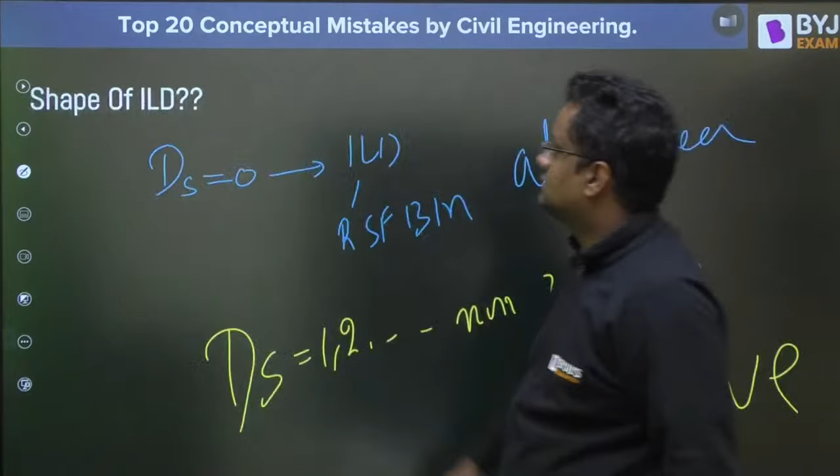Point 14: No, Hooke's law is valid up to proportional limit - this statement isn't going in that way. You all know Hooke's law is valid only up to the limit of proportionality, only when the stress-strain curve is linear. No, this point goes much beyond this.

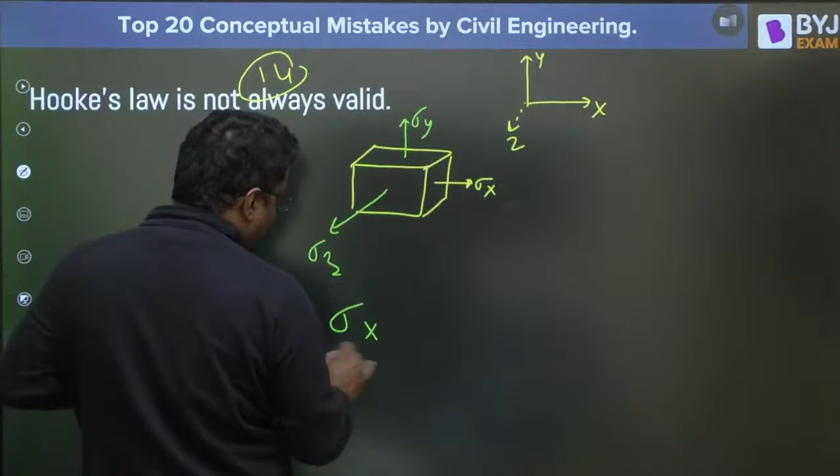Guys, suppose this is a body. Here we are applying sigma x in the x direction, this is y direction, and coming out of the screen towards your head is z. So this is sigma x, this is sigma y, this is sigma z. So sigma x by epsilon x is not equal to E, sigma y by strain in y direction is not equal to E, and so on.

You must know that Hooke's law is only valid for unidirectional loading, only for unidirectional loading, guys. For multi-directional loading, sigma x by epsilon x is not Young's modulus.

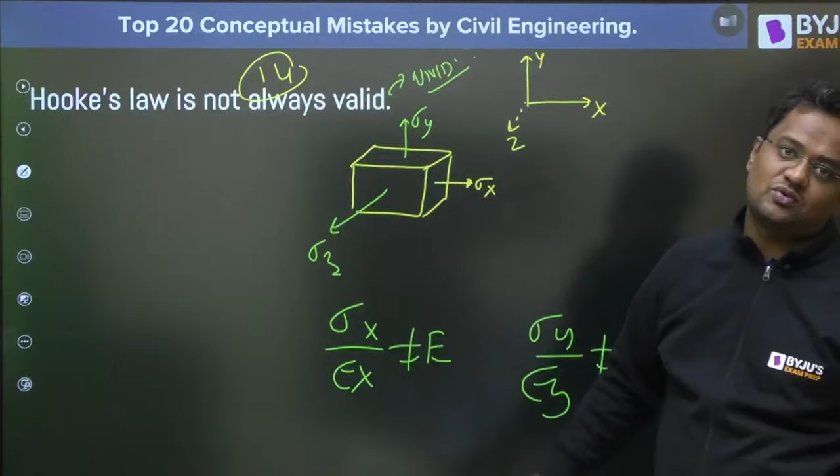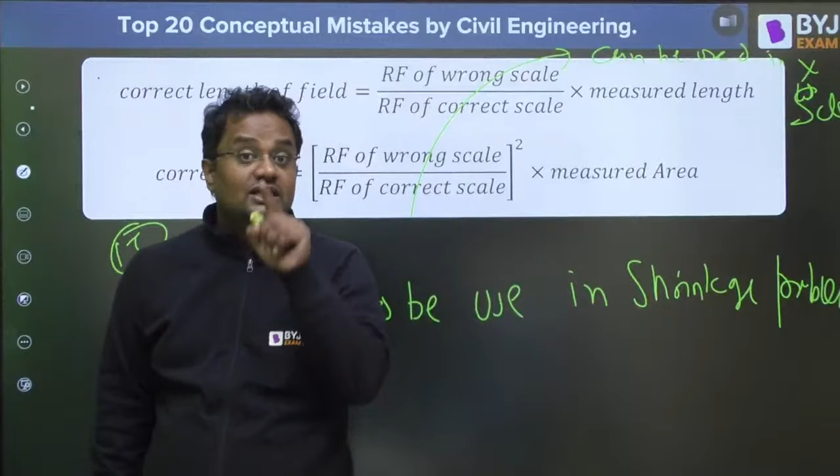This cannot be used in a shrinkage problem. It can be used in the wrong scale when you apply the wrong scale. But in the shrunk scale you cannot apply it, because the shrunk scale of the shrinkage map is not the wrong scale. The shrunk scale of the shrunk map is the correct scale, but that is of the shrunk map. Got it? Okay.

So this was the 15th point. Now the 16th is reciprocal leveling. For reciprocal leveling, a session will be coming tomorrow at 11 AM, a 2-3 minute video where I will tell you a short trick in the daily dose. Tomorrow 11 AM, I'll tell you there.

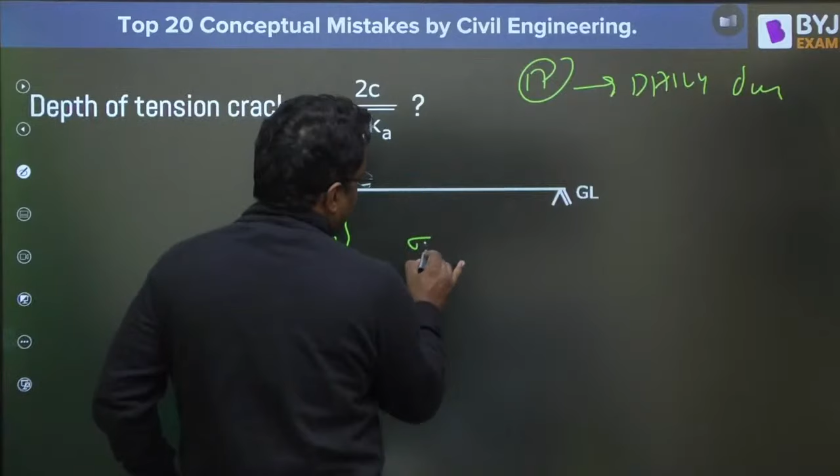So the 17th point, that I have also told you in the daily dose. Please see, this is not valid always. This is valid: the depth of the tension crack where the soil loses contact. The critical height will be double of this. So here, sigma h equals Ka sigma v minus 2c root Ka. Sigma v is gamma z, so sigma h equals Ka times gamma z minus 2c root Ka. From here, z equals 2c by gamma root Ka.

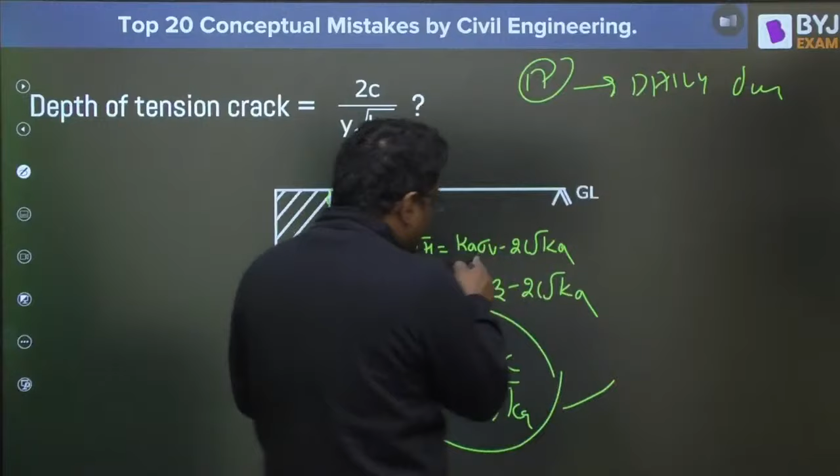Excellent. But what if a surcharge is also applying? If a surcharge is there, then it will not be gamma z alone. Sigma v will be q plus gamma z, where q is the surcharge. Then the equation will be different, and the value will be different. Sigma is zero, so the negative region is not present up to this much depth. It will be different. Got it?

This is tomorrow 11 AM. Tomorrow 11 a.m., a 3-minute video with a short trick of reciprocal leveling that you have never ever studied.